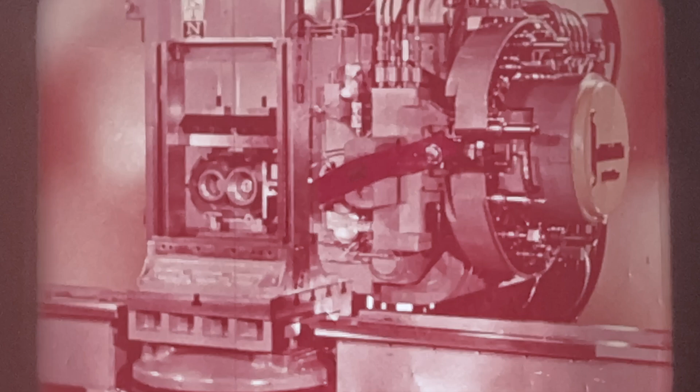For instance, just think of the fantastic strides that your own industry has achieved due to the introduction of the first numerically controlled Milwaukee-Matic machining center in 1958. Kearney and Trecker research introduced a completely new concept of metal cutting, another right combination that has had a tremendous effect on our overall industrial progress.

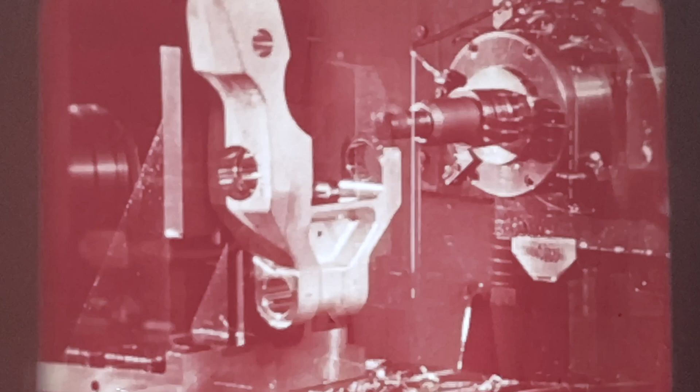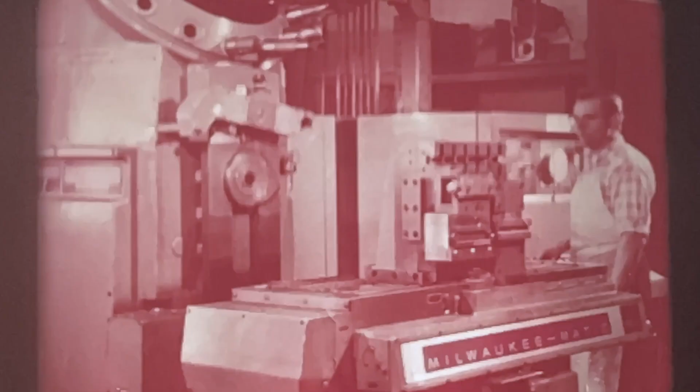Old production systems faded into history. Unbelievable strides were made in quality control, in the reduction of lead time, and in total production costs. Every phase of the metal cutting industry has benefited from this breakthrough. However, like our exploration of space, there is still much ground to be covered. There is much to be achieved.

For instance, your industry has historically been limited to the consideration of frozen designs when purchasing machine tools. Size, range, and feature limitations sometimes made finding exactly the right combination for your particular needs virtually impossible. This has been especially true in the selection of equipment designed to produce medium to large size workpieces. Frozen designs here often force management into costly compromises.

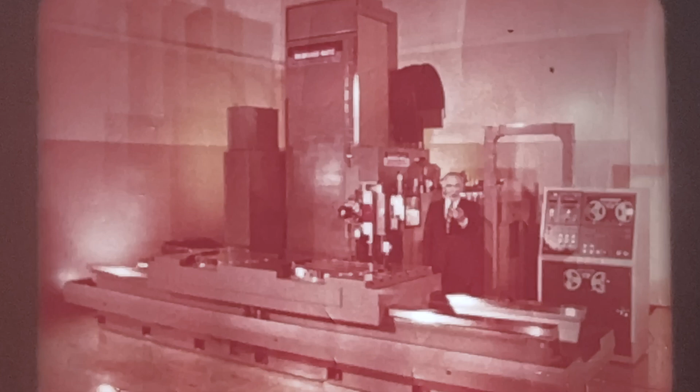Kearney and Trecker concentrated its research and experience in an effort to eliminate this nagging problem. The result is our newest breakthrough, flexible design. Here at last is a numerically controlled machining center that is made to order, your order. The key is in the name, Moduline, the Kearney and Trecker flexible design concept that has created a metal cutting system tailored to your own individual workpiece requirements.

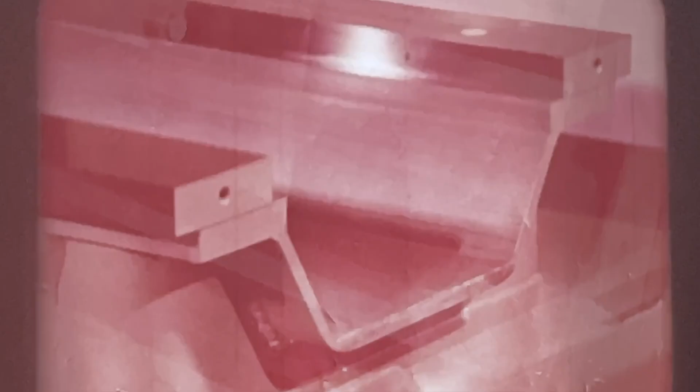And through the use of standard modules, Kearney and Trecker has broken the high cost barrier in the medium to large size job lot workpieces. Moduline is basically a 3-axis, horizontal spindle, numerically controlled Milwaukee-Matic machining center. The bed is a 1-piece steel weldment. Oversized, hardened, and ground steel ways are mounted on the bed. The ways are long enough to support the table in its extreme limits of travel.

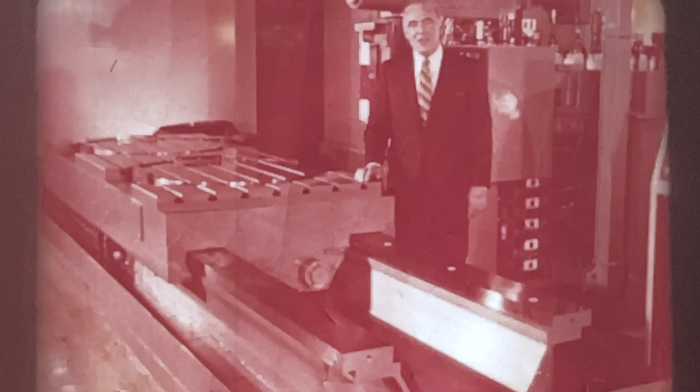Due to Kearney and Trecker's flexible design concept, beds may be ordered in 3 different lengths. See what we mean by the right combination? And that's only part of the story. This massive steel upright weighing almost 8,000 pounds is available in 4 modular heights. This component was designed to provide exceedingly rigid support to the spindle head in both Y and Z axes. Rigid support such as this is absolutely vital in the precision production of medium to large size parts.

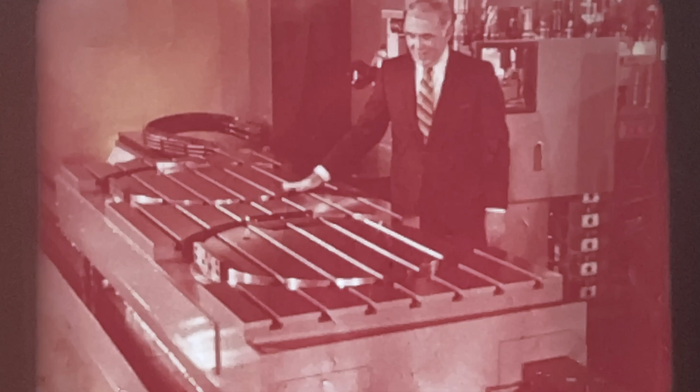This model of Milwaukee-Matic Moduline is equipped with 32-inch diameter dual index tables. Each table will hold a 7,500-pound workload. These tables are built in, flush mounted, not an add-on or accessory unit. So management no longer needs to make costly compromises by buying clumsy, hard-to-fit-on auxiliary tables. And with flush mounting, the entire table surface can be utilized, all 98 by 40 inches.

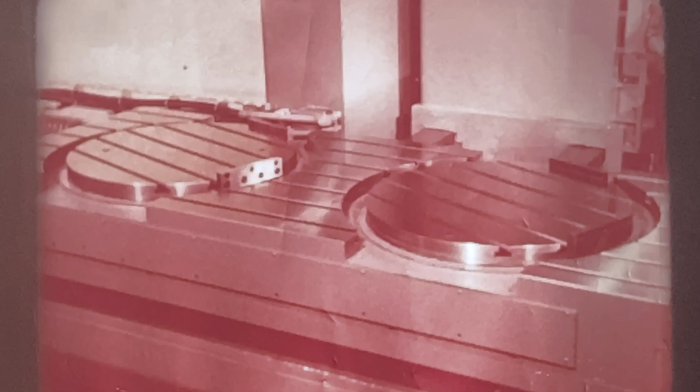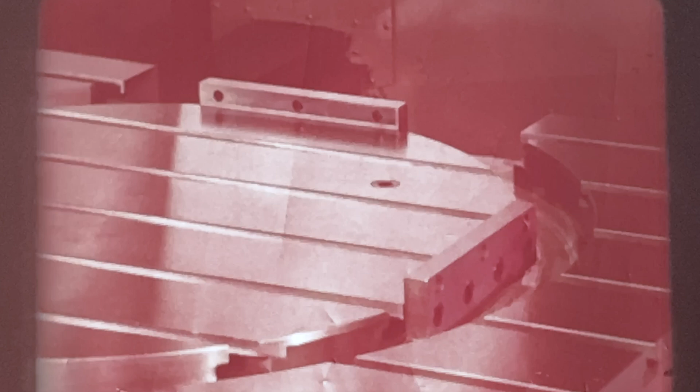Through the use of a curvic coupling, these index tables can be accurately positioned in 5-degree increments for a total of 72 index positions. All tables are equipped with edge locators, for fast and accurate setup of fixtures. Moduline is also available in a single index version, mounted in a 40-inch wide base, 50 inches long, or 74 inches long.

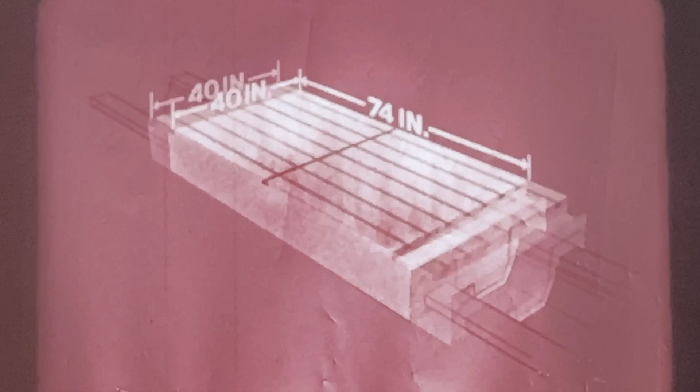Moduline may also be ordered with a plain table, a non-indexing type, 40 inches wide and available in 3 different lengths: 50 inches, 74 inches, or 98 inches long. Maximum load for all sizes is 15,000 pounds. Kearney and Trecker engineers have designed a 4th axis capability for Moduline, with this 32-inch diameter rotary feed table, another standard module. It's also possible to index workpieces to any of 360,000 positions in increments of 1/1000th of a degree.

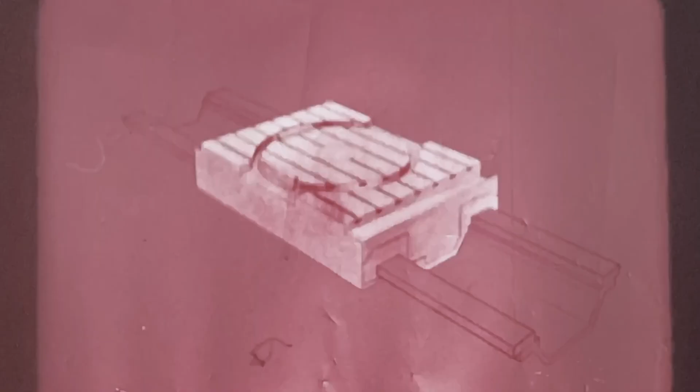The rotary table is flush mounted in the base, providing an overall working surface of 40 by 50 inches. Maximum table load is 10,000 pounds. Moduline utilizes the same time-proven features that are present on all Milwaukee-Matics. For instance, a version of Kearney and Trecker's patented tool changer system is standard equipment. Tools are automatically changed in just a few seconds.

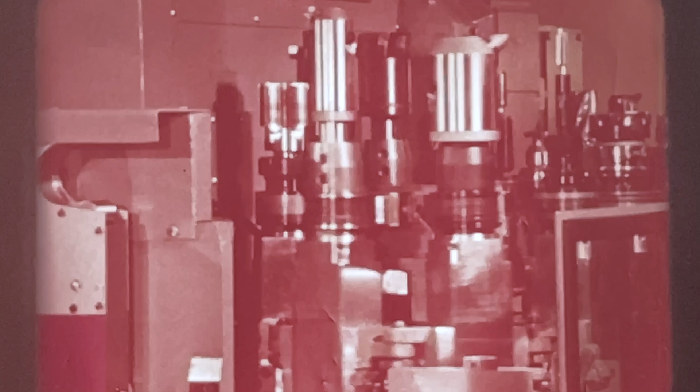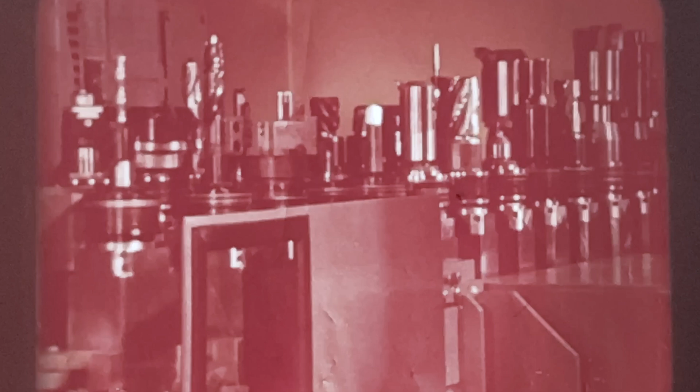The tools are pre-selected during machining functions by means of coding rings on the tool holders. The Kearney and Trecker octal system codes over 32,000 different tools. Moduline has a capacity for 30 preset tools at any one time, 29 in the tool storage magazine and 1 in the spindle. However, there's a flexibility in tool storage, too. Modulines may be ordered with a capacity of 40, 50, or 60 tools. It's your own decision to make. Another facet of the right combination.

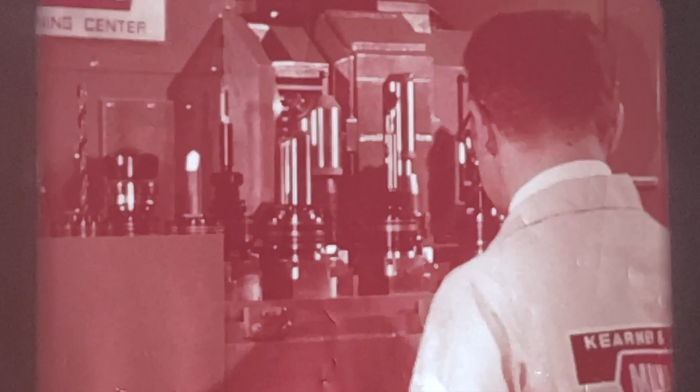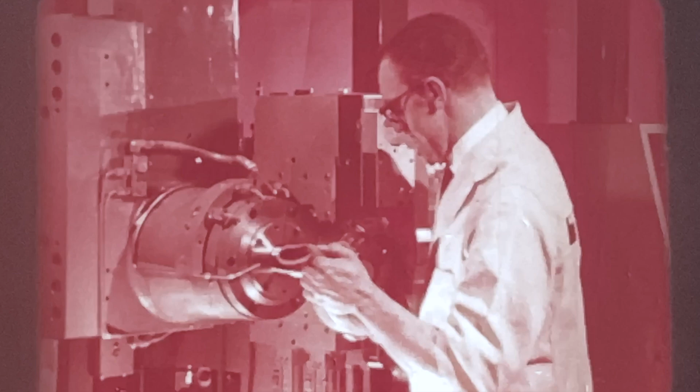Tool coding allows the machine operator to add or replace tools at any time without interrupting the machining cycle. Tools up to 6 inches in diameter and any practical length can be automatically changed. Tools larger than 6 inches in diameter can be manually loaded in the spindle. The Milwaukee-Matic Moduline spindle has been specifically developed for these new machining centers. There's plenty of spindle power available for roughing cuts.

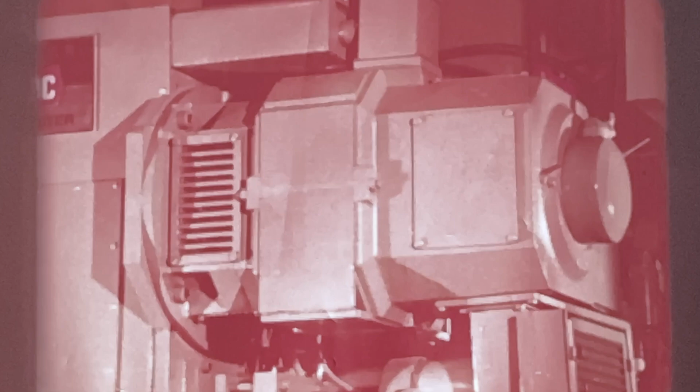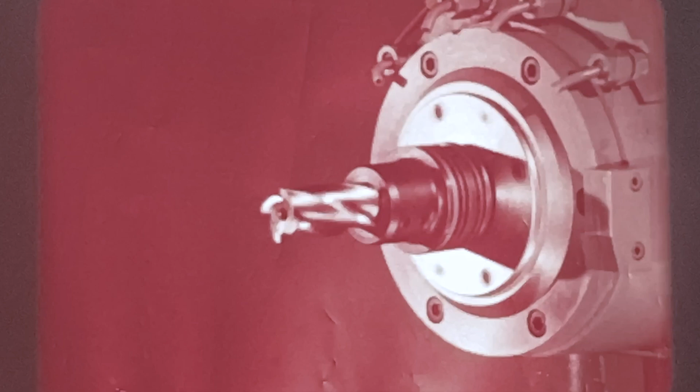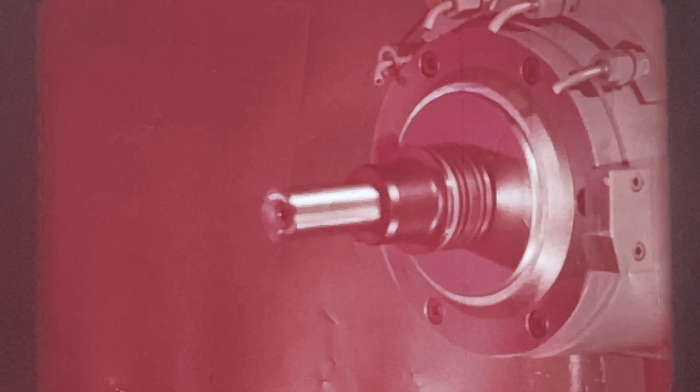This rugged drive is powered by a variable speed DC motor that delivers a constant 25 horsepower at all speeds above 116 RPM. In the low range, speeds below 116 RPM, the drive is engineered to deliver constant torque. 270 spindle speeds may be programmed, from 4 to 3,600 RPM, a range designed to handle any metal cutting assignment.

The spindle nose has a keyway to accept the drive key of a tool holder. This keyway is oriented during the tool change, providing a positive radial location of the tool in the spindle. The spindle can also be stopped at this same orientation during the machining cycle, permitting single-point tools to be moved clear of the work before retracting.

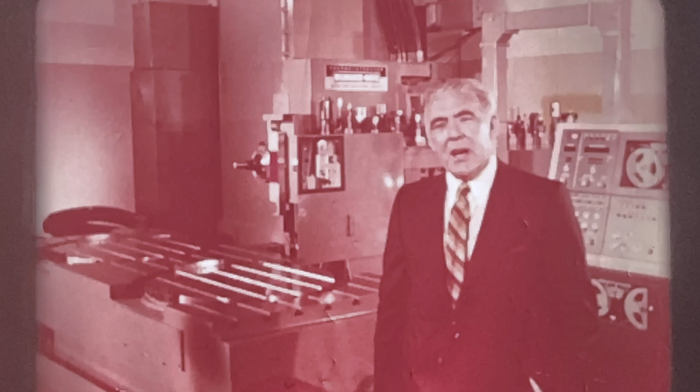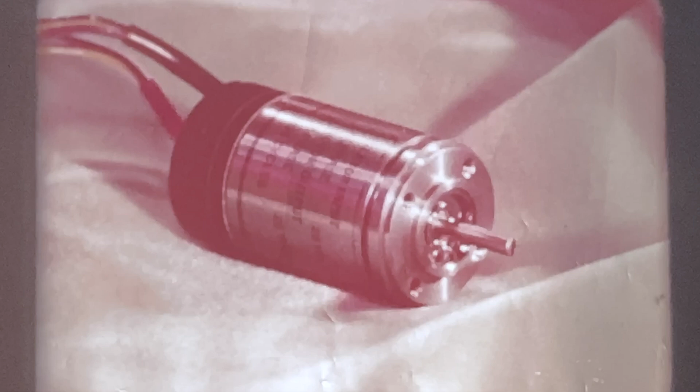All axes of Milwaukee-Matic Moduline machining centers are driven by identical high-performance DC motors. These are fixed to precision, recirculating, ball-type lead screws. Rotary resolvers provide a closed-loop feedback for linear axis positioning. In many large-capacity machine tools, there's a severe tool sag and deflection problem. When machining large-size workpieces, the quill must be extended. Under these conditions, rigidity is sacrificed. Kearney and Trecker engineers have practically eliminated this problem by mounting the spindle on a massive moving column. The true milling capability that you expect from any Milwaukee-Matic.

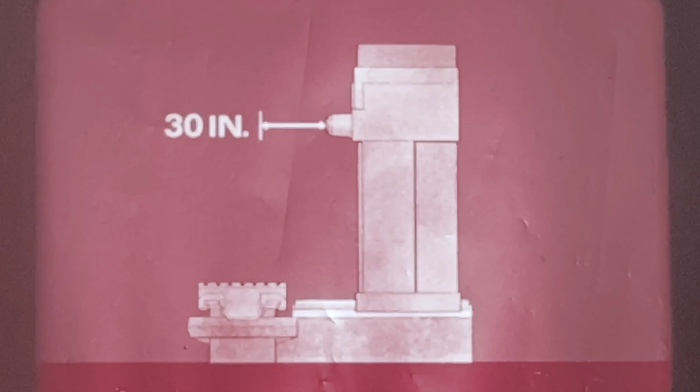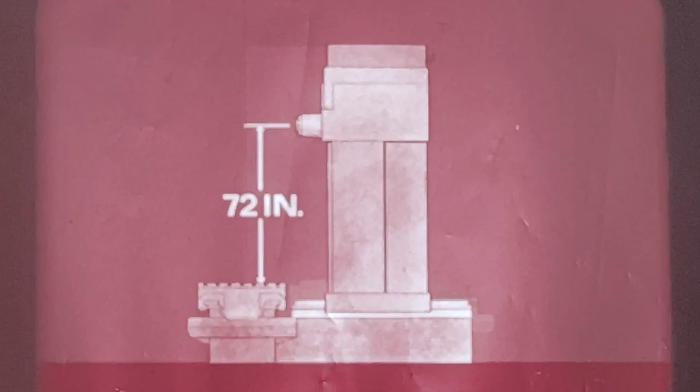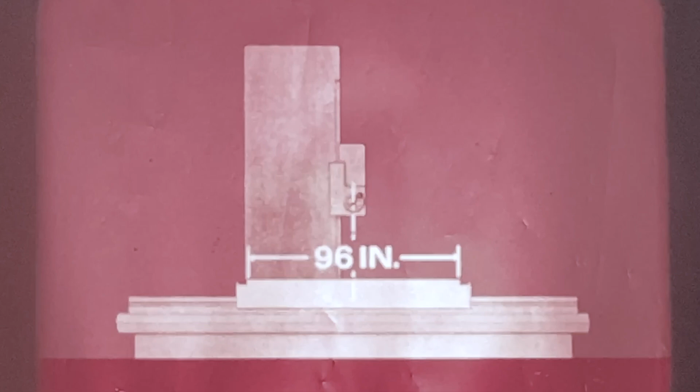The Z-axis moves 30 inches with a maximum distance from the spindle nose to the center of the table of 39 inches and a minimum of 9 inches. The Y-axis is available in travels of 36 inches, 48 inches, 60 inches, or 72 inches. The longitudinal, or X-axis, may be specified in travel lengths of 48 inches, 72 inches, or 96 inches. The feed rates of all axes are 1/10 to 98.9 inches per minute in 1/10 inch increments. Rapid traverse is 200 inches per minute.

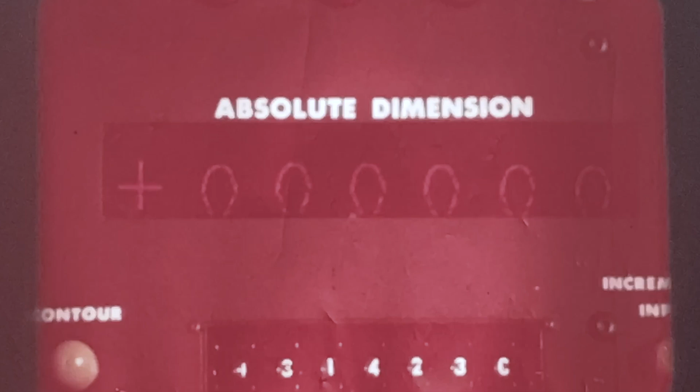All functions of Moduline are under tape control. The use of integrated circuits make this specially designed control compact and reliable. A standard unit provides for point-to-point drilling, boring, reaming, and tapping, as well as straight-line milling, parallel to a machine axis. The control has many standard features, such as zero offset in all 3 axes, feed rate and spindle speed override, manual data input and display, block-by-block control of input data, very useful in proving out parts.

This basic control is also capable of positioning all axes simultaneously. Other versions of the control provide contouring with linear or circular interpolation. One 300 character per second photoelectric tape reader is standard equipment. A second reader is available as an option.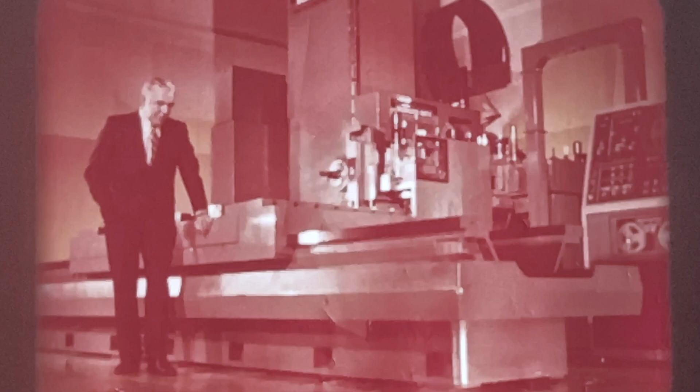Most machine tools of this size require costly excavations and foundations. Moduline has been designed to be installed completely above the floor. And they're clean units, too. That's also part of the design. A chip and coolant trough runs all the way around the bed.

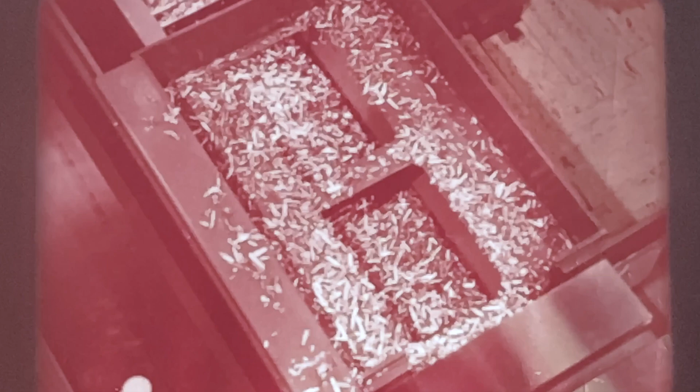This optional link-type chip conveyor completes the system. It's very important to keep in mind that this equipment has been built from the ground up for numerical control, designed by the same engineers that have made the Milwaukee-Matic name the established leader in the machining center field.

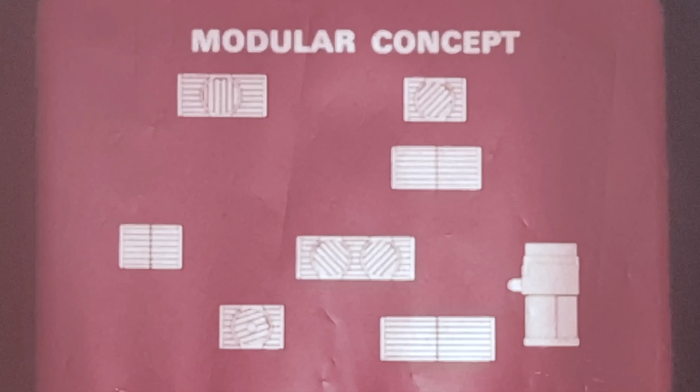These same experts have now broken the frozen design barrier of machining centers. Now the modular concept is a reality. For instance, Moduline tables come with 4, 6, or 8 feet of travel, with a choice of 4 styles: plain, single index, dual index, or rotary feed tables. The column upright is available in 3, 4, 5, or 6 feet of travel.

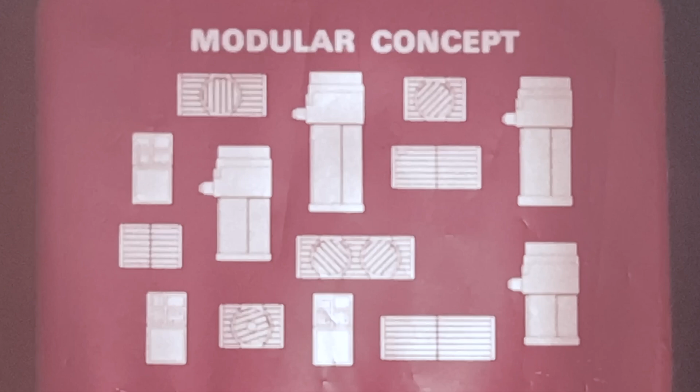Moduline controls can be ordered with such options as linear interpolation or a combination of linear and circular interpolation and mirror image. In all, there are 28 different models of Modulines. It's Kearney & Trecker's aim to provide its customers with the right combination, and that is machining centers tailored to specific workpiece requirements.

It is all important to remember that the purchase of a Moduline machining center includes the services of a Kearney & Trecker application engineer. This expert will train your machine operators and will help put your unit into production. In addition to this in-your-plant training, Kearney & Trecker conducts a regularly scheduled training school here at our Milwaukee headquarters. A 5-day course covers such topics as programming, tape preparation, and tool setting, conducted by Kearney & Trecker personnel, who collectively have more experience in numerical control machining centers than any group in the world.

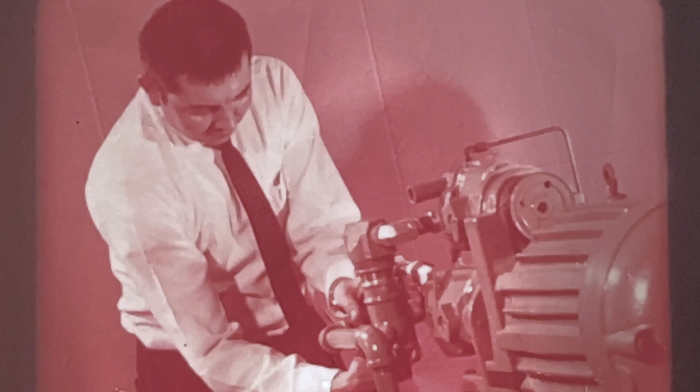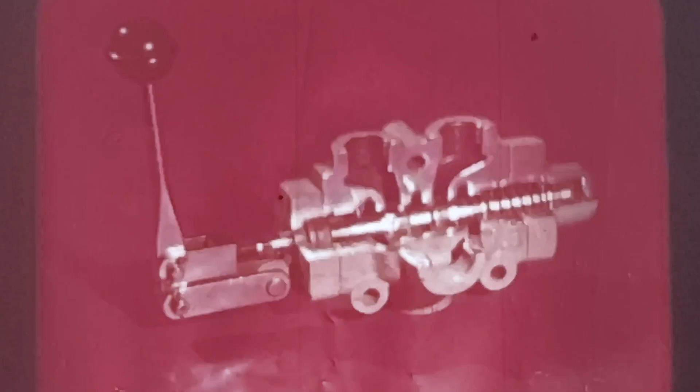A 5-day course is also available in maintenance training in both the mechanical and hydraulic functions. And another 10-day course is available in maintenance training for electronic functions. Classrooms are equipped with machine and electronic simulators and cutaway models of components. The very latest visuals are incorporated in the courses, including closed-circuit television.

And the purchase of Milwaukee-Matic Moduline also includes training textbooks on installation, part processing, tool setting, machine operation, replacement parts, and complete machine and control maintenance manuals. We have now seen the basic hardware and the backup material for this exciting new Moduline. But let's consider for a moment what this breakthrough means to you in terms of management control.

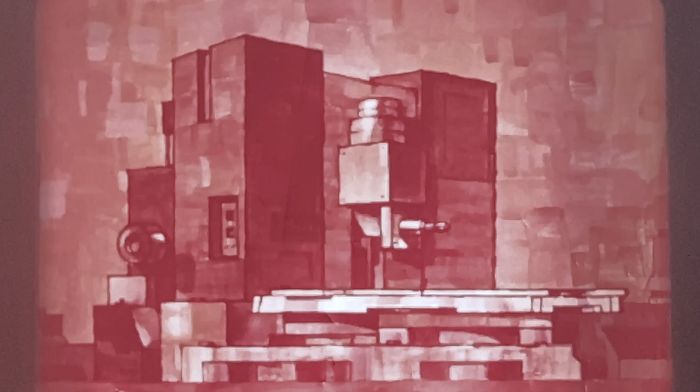Without a big capacity, numerically controlled machining center, large-size workpieces must be produced in the old-fashioned and expensive conventional method of manufacturing. Under these conditions, a shop must be equipped with many oversized machine tools, costly single-purpose machine tools. Hand in hand with this large investment is the fact that large-size workpieces usually come in pitifully small job lots. Therefore, most big single-purpose machine tools stand idle much of the time, producing neither product nor profit.

And consider lead time and materials handling. With this slow, ponderous method of manufacturing, hard-to-handle workpieces must be dragged from machine tool to machine tool. And anywhere along the way, there's the possibility of scrap. Oversized, partly finished workpieces are also a headache to store. And thousands of dollars of working capital can soon be tied up for long periods of time in aging metal.

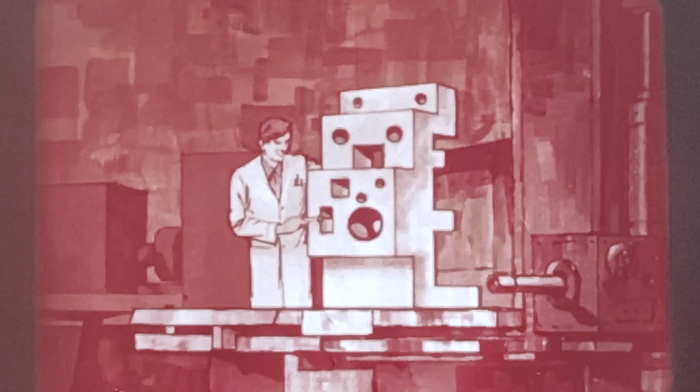And we haven't even mentioned inspection. With conventional methods, because of the risk of scrap in every operation, inspections must follow every operation. A costly process in terms of people and equipment.

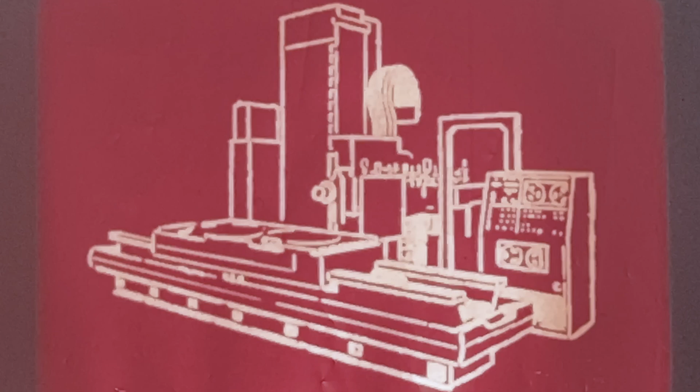Milwaukee-Matic Moduline machining centers allow shops to produce medium to large-size parts in one place, on one numerically controlled machining center. And on a unit that has both the big capacity for large workpieces and the ability to economically handle medium-sized workpieces, which is often the bread and butter of your business.

Before your company makes any move toward a big capacity machining center, doesn't it make just good business sense to look to Kearney & Trecker, the experience builder? No other source offers you a choice of 28 different models. But then don't you expect the very latest and most significant breakthroughs to bear the name Milwaukee-Matic?